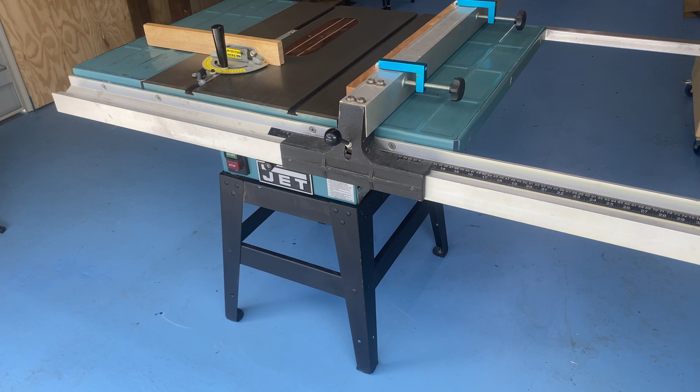In this video, I'll be making my table saw mobile.

My workshop is, I like to keep it clean, and I don't have huge dust collection systems. So most of my work on the table saw, and I do a fair bit making hives and whatnot, but it needs to be done outside. I need to be able to move the table saw outside the workshop. I built it with a big awning out the front for this purpose.

After looking at a number of the options locally, I decided to go with the Bora heavy duty universal mobile base. This is overkill for this table saw. I do intend eventually on adjusting one of the wings on the saw and putting a router table in one of the wings. I built a cabinet for my router probably a bit over a year ago, and while it's okay, it's functional, it takes up a lot of space for what it is. I just don't use a router enough to justify the amount of space it takes up.

So this is what I went with. Let's have a look inside.

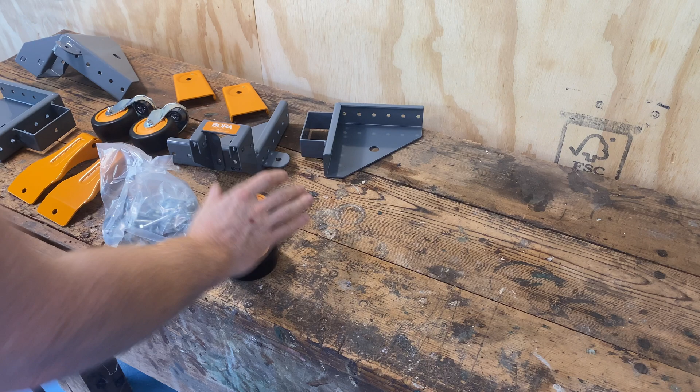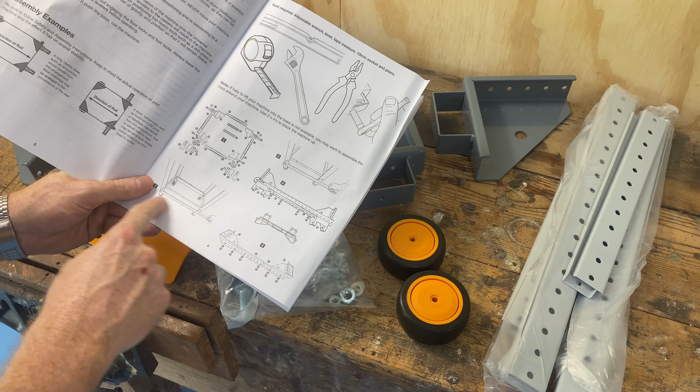So this is what came in the box. And the instructions explain how I've got to put it together. The first step though is going to be measuring the base of my table saw just so I can make these side pieces the correct length.

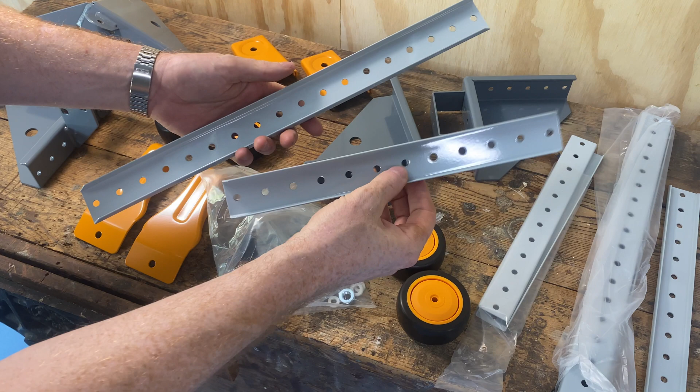As you can see with the side pieces, there are shorter and larger sections, and the shorter sections are narrower, so they slide inside the larger sections. That's so you can get your correct length, of course.

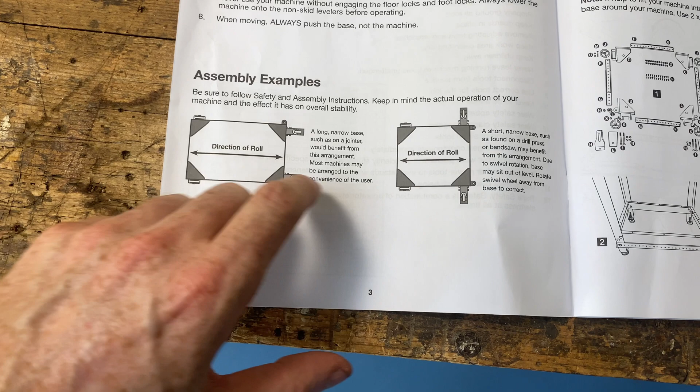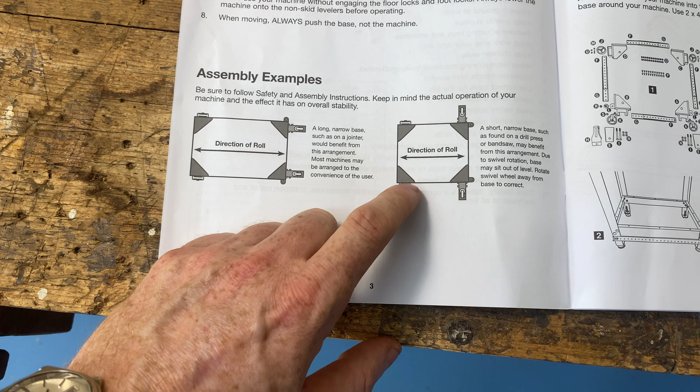They do give recommendations. You can put the wheels sideways for things with a really small footprint. For example, if you were using this base with the casters with a drill press or something like that, you could certainly put the wheels sideways and they'll give you a bigger footprint when you're moving it around.

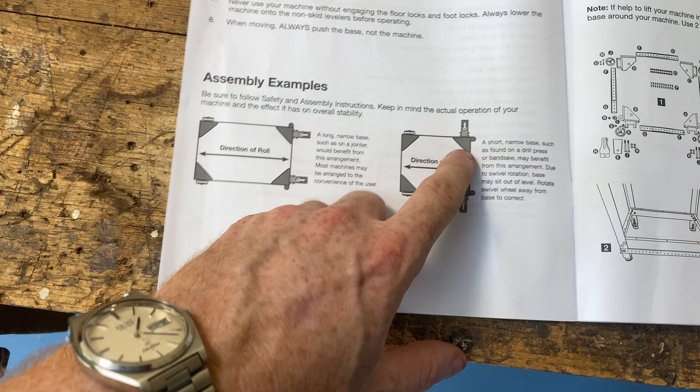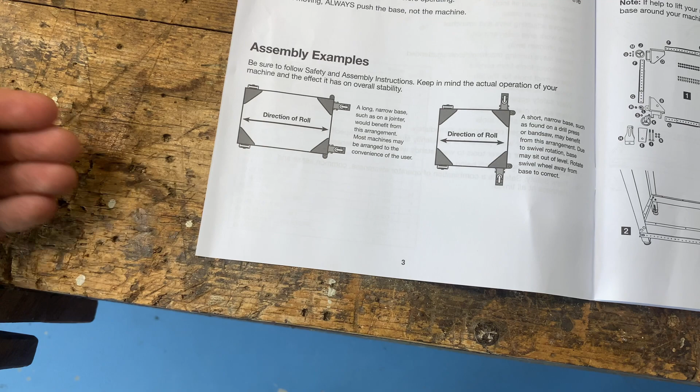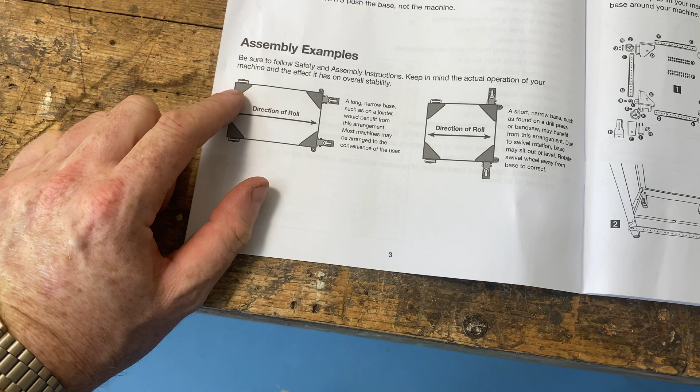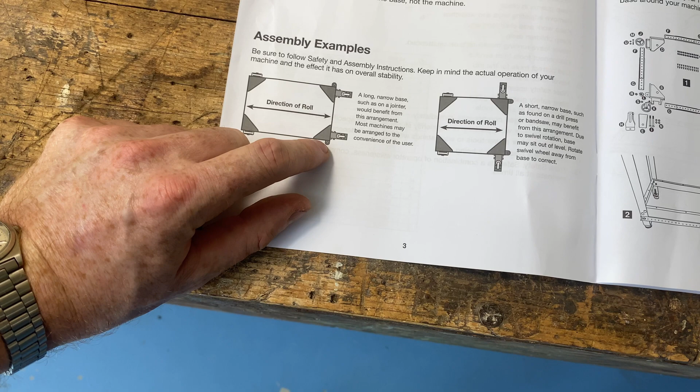My table saw has a fair footprint anyway, and I don't want the wheels sticking out to the front or back like that, so I'm going to go with them being in line with each other, the back wheels and the lowering casters, and I'm going to put them going sideways across the table saw. Because if you think about a table saw, you're pushing the wood through it, so the pushing direction, I want them to go this way with the wheels facing that way, because this back wheel here is still technically able to roll, and it's the feet that lower down when you lift the casters that stop it from moving, but I'd still prefer these to be at 90 degrees to the direction of force.

So that's what I'm going with. And this is why you measure before you get started. My amazing discovery is I won't actually need any of these smaller pieces. The lengths I'm dealing with, I can just use the larger side of the pair, and it's actually long enough with plenty of overlap actually. So if you've got a larger machine, obviously you're going to need to join these together as per the instructions, but I'm not going to need to.

I'm in two minds about that. A, I'm of course paying for extra material that I didn't need, but B, it should theoretically be a little bit more rigid, so yeah, that's a plus.

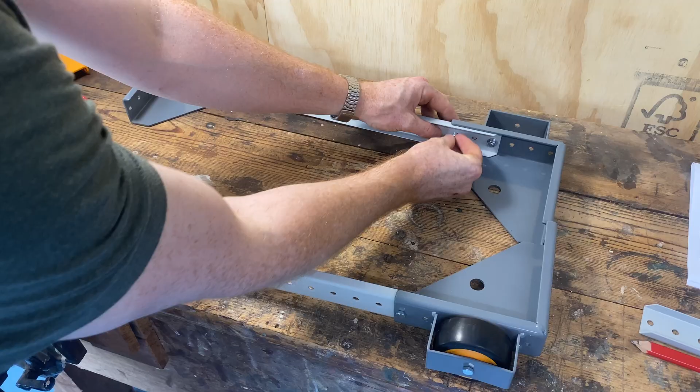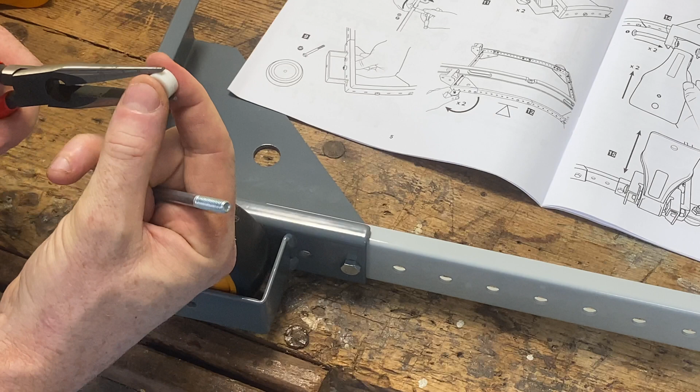This wasn't in the instructions, but I figured out that 2 washers on the inside of this wheel here works better. Now there's no easy way to hold these, so I'm using needle nose pliers to slide them down, and so I can get this bolt through.

Bingo. All right. Now the reason for those 2 washers, it just keeps the wheel on the outside here so it doesn't hit that bolt head that I've got on the inside there.

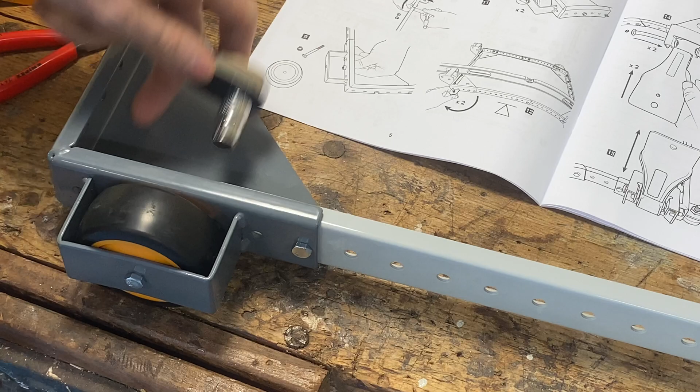I will show you quickly. It doesn't matter if you pinch the wheel because it's actually spinning on a bearing. The center of the wheel doesn't move against the metal. So that's quite high quality in my mind anyway.

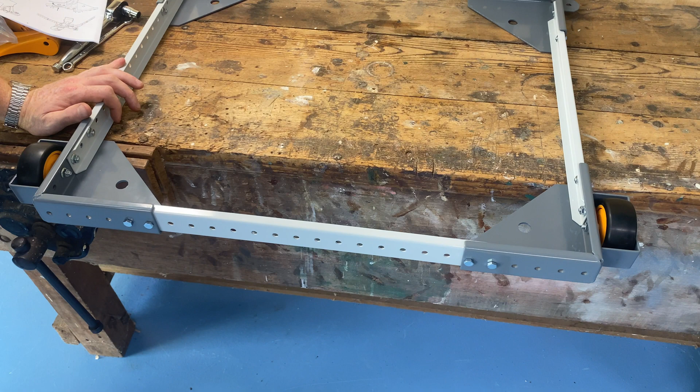As it turns out, along this longer side, if I just use the one piece, I'm only getting 2 bolts or 2 holes in on each side. And as you can see, before I tighten it up, there's a fair bit of movement in there. I'd prefer the 2 bolts to be further apart.

So I am actually going to use the second stretcher that fits inside on these 2 longer sections. You can see with that extra stretcher in there now, I've now got my bolt holes further apart on either side and quite a bit of overlap in the middle. So it's much sturdier, even before tightening it up, it's much sturdier.

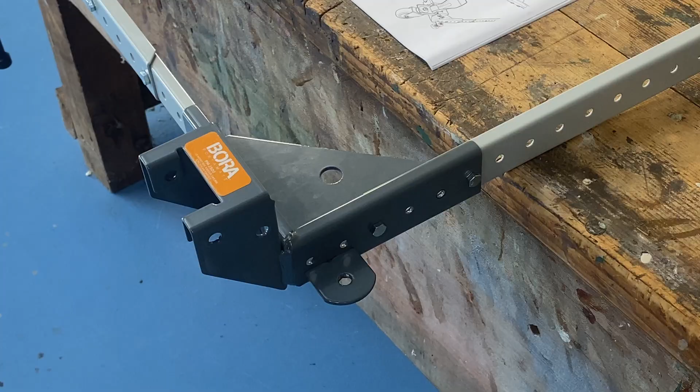Next I've got to add these little leveling feet, and I didn't realise, but these holes are actually threaded. There's a bit of paint in there, but the thread of the bolt should cut that out as it goes through. These are used so the machine sits on these when you've got the caster. The caster can engage and disengage, and when disengaged the machine sits on these feet and the wheel at the other end. I'm going to level these with the wheel so the frame is level before I put the casters on.

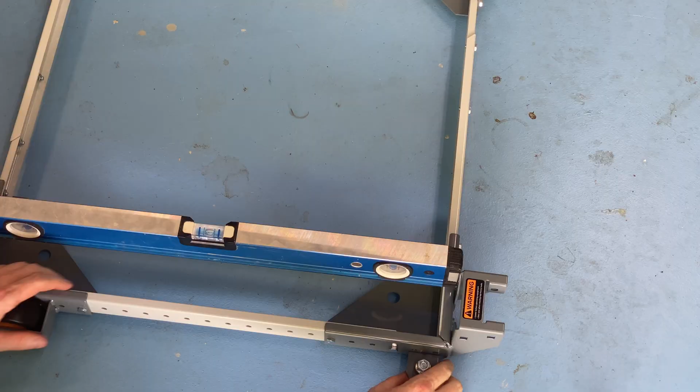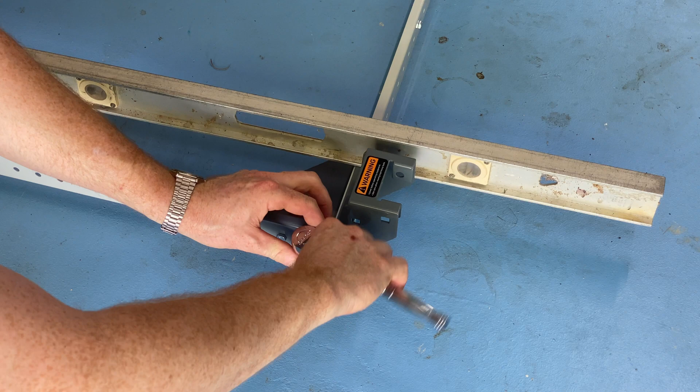So the base is sturdy and level. It's now time to put in the final, or adjustable, casters and the levers. I'm also considering adding a square of plywood in the base. This would make it much more rigid. The downside is it'd lift the machine by another half inch or so, depending how thick a plywood I use. Still thinking about it.

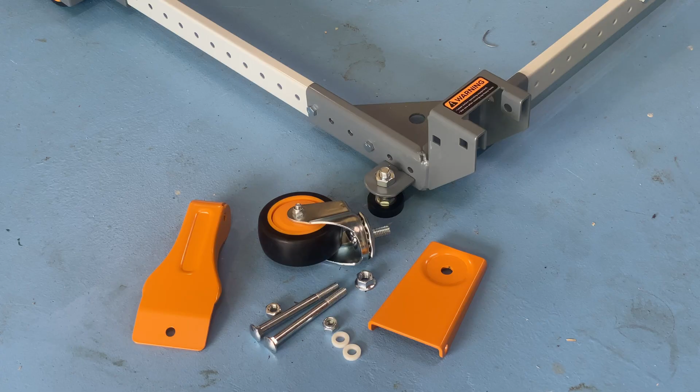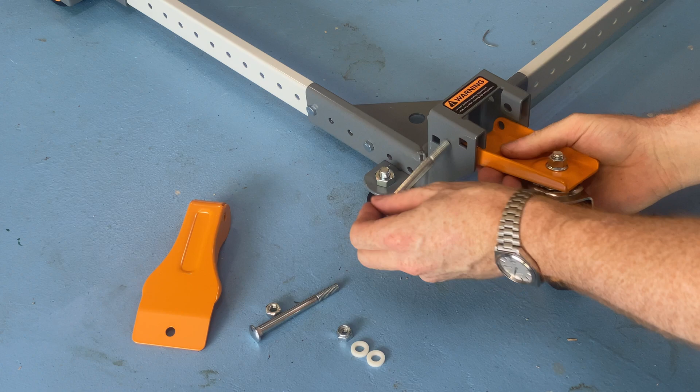In assembling the adjustable casters, I've just done the other side so I didn't make a fool of myself on camera. The instructions say to do the wheel last. I find it's actually easier to do first. Side ribs up. And the wheel goes through the second hole at the back there.

You can see the bolts have a square locking section just underneath the bolt head. So as you put it through, you can turn it until that square lock slides in. Now on these casters they come with lock nuts so they won't come undone.

Now this is the lever that pushes the caster up and down. So right now you can see it's not actually engaging. The machine would still be resting on this base foot here, but when you engage the wheel it pushes it up so you can wheel it around.

Now the bolt goes through one side. You're going to have one of these nylon washers on either side of the lever. Just like before, I'm going to use the needle nose pliers. The instruction manual just says push a bolt through from the other side, which is fine too. I just find this way easier. Except for this time when I missed.

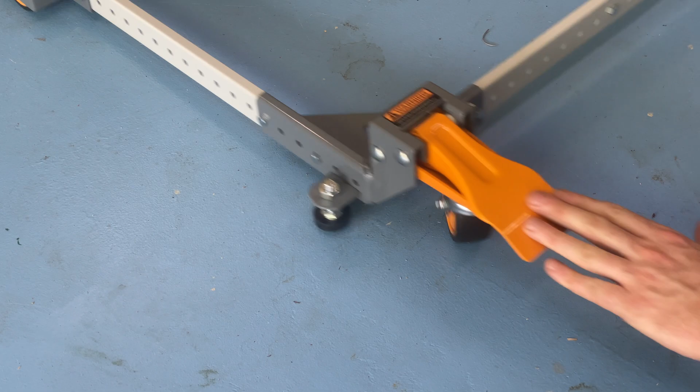Being lock nuts, they don't have to go super tight. You don't want to bend any of the metal. And there you go, done. You can see when the lever's up, the machine sits on the foot there. When you push the lever down, it lifts the machine. And when you do both sides, you can roll it around.

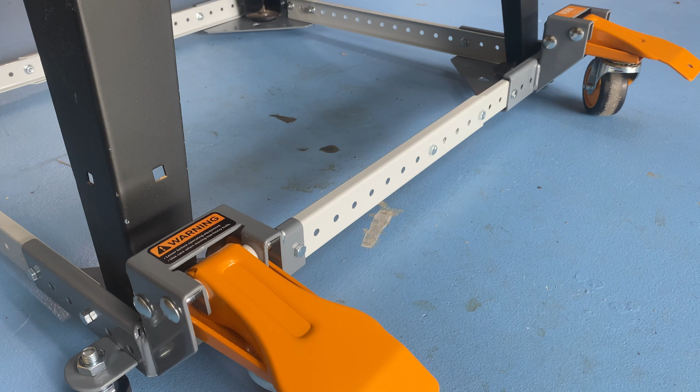What do I think? Well, it's plenty sturdy. If I push on it, I do get some movement, and ideally you'd have none. But it is minimal, and in terms of the way I use a table saw, it isn't the end of the world. I do really want to put a piece of ply across the base. I think that'd stiffen it up that bit more, and maybe I could take the rubber stoppers off the feet and actually bolt through the feet, through the ply, and through these corner sections of the casters.

That's an idea for the future. I'm not going to do it now. For now, it's perfectly usable. It seems to be a really well-made product. The powder coating's good, and all the components seem to be of a high quality. I'm really happy with it.

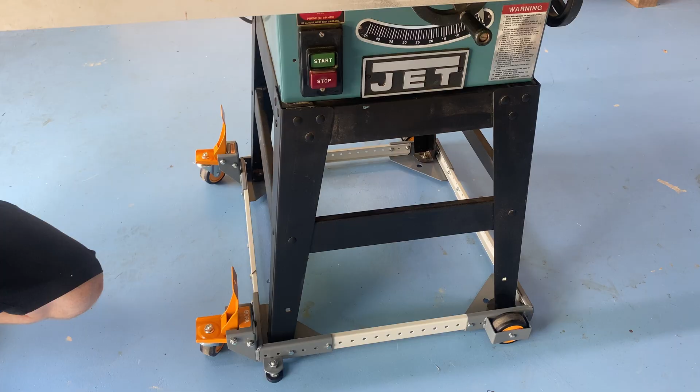With that said, who's it for? Well, I could make a dolly or even a cabinet cart for this table saw. Maybe one day I will. But in terms of a quick solution that's not too expensive, that works well, does what it says, I really like this. And I think in the event that I eventually do build a cabinet base for this table saw, or perhaps weld up something a bit more substantial, I'm still going to use these 4-corner casters. The design, particularly of these lifting casters, is just excellent. I love it. It's really good.

So anyway, that's what I did to make my table saw mobile. I hope you found this video useful. Thanks for watching.